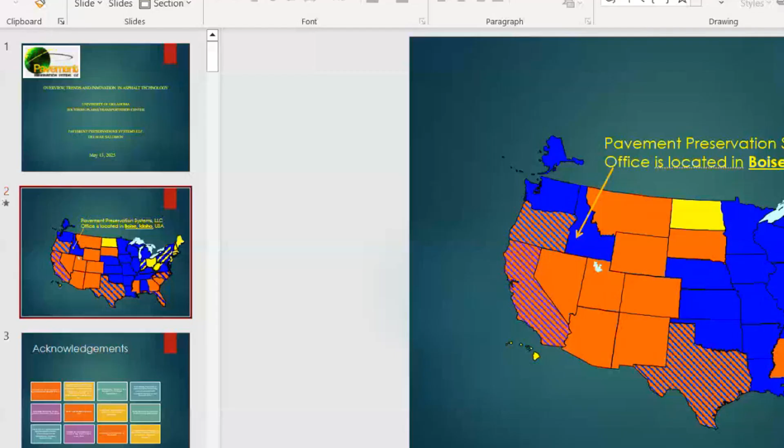And what we're doing is going through really a tour de force of this. It's on very specific things. There'll be a lot of references in the back for you to see, and we can go on from there. But I want to give you a kind of walkthrough of this.

So as I said, there's little I did, and there are acknowledgements. I could not do this without all the people. As I said, I stand on the shoulders of giants, so to speak. We have many contributors in here and research reports. I should say that I give you this outline. I'll talk about...

things like transportation logistics, but very, very short, and the things that have come across. And I'll also talk about some asphalt additives. I'm not going in deep in that, just as a glimpse of what's going on. There are a lot of new things, all right? And every time you turn around, there's something new. That doesn't mean it's necessarily good.

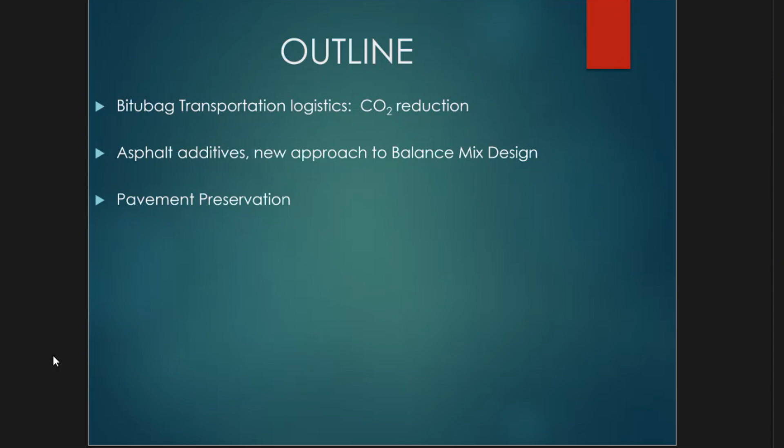really, the core of this talk, I think, is quality. We always talk about technical things, but the fingerprinting of the asphalt, it's been around, but there are some tools that are out there, new, necessary to this industry, and I want to talk a little bit about that at the end of the talk. And then I want to talk about a process innovation.

When I talk about a process innovation, it means that it increases productivity. And so I'll show some tools, technology that exists. If you put them together, they become a process innovation. They increase your productivity, okay? So it's not all about one thing, there's lots of technologies. And so we have to put them into processes, so to speak. And...

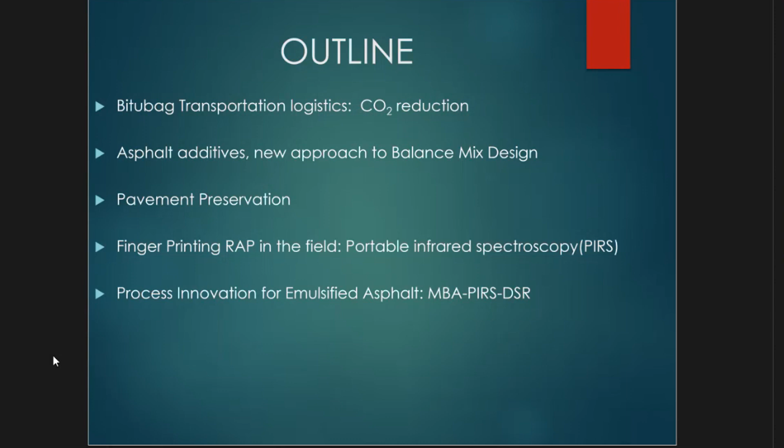then I'll have the conclusion on this. But before I say, asphalt is a very complex thing. We'll hear that. There's a mantra that the world is very complex, from politics to materials. But we have to make some assumptions, not some premise. And in asphalt, what do we say?

And what you see, I think what comes from all this, and I was talking with Ken in the laboratory, I see all the equipment, all that went through and so forth and so on. Asphalt starts out with the name ductile. It's ductile, flexible. But guess what? Like everything, it ages and it goes brittle. And what I see in the industry today is a struggle for finding, hey, where does this fail, right?

At the beginning of Superpave, it was rutting, right? Oh, there was rutting. Let's cure that, okay? So I think, remember that premise. We start from ductile and we end up in brittle. And what all this stuff is all about, where can we catch this? How can we measure it? What's the best way? And I see all the cracking tests out there. So it means we're still searching, but it's a good thing.

So let me talk about the traditional asphalt logistics. It's hot asphalt. And how do we know about this? Well, I would say half the world uses asphalt in a solid bag. Asphalt is cold. How many have seen asphalt cold in a bag, 1 metric ton? Anybody have seen that? Okay, in the Andes, South America, the 5 Andean countries, Peru, Ecuador, Colombia, Bolivia, Chile,

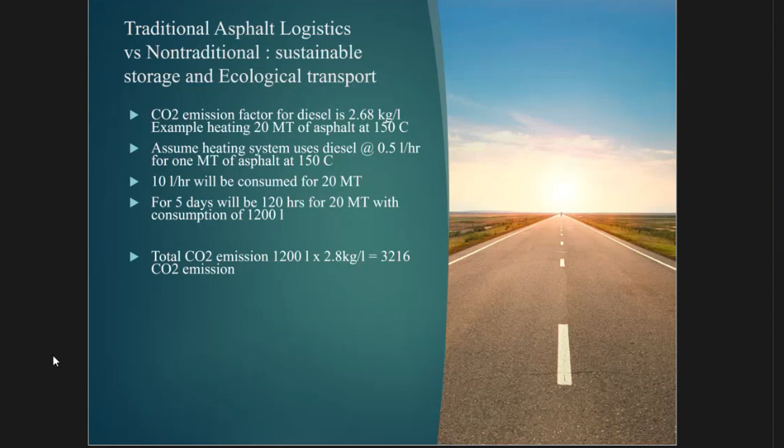Since we talk about carbon footprint, this is an opportunity to throw that in. So for hot asphalt, these are some parameters you can look up - there's a diesel factor and so forth. In the end, you do some calculations for 20 metric tons of asphalt.

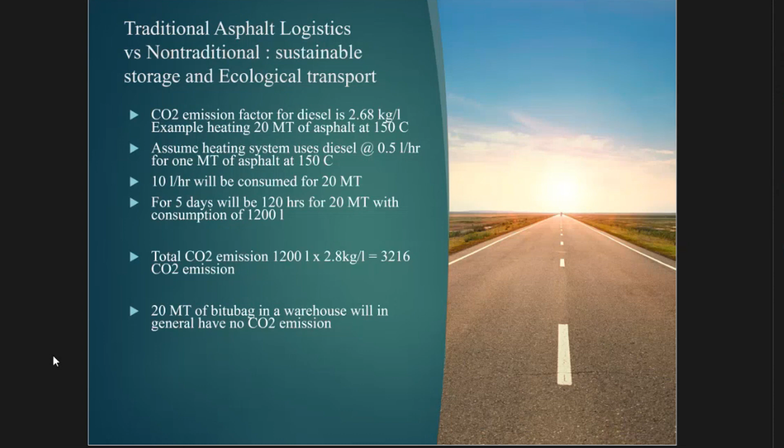And you have 3,200. Well, the hot asphalt will be sitting in storage until you're ready to use it - imagine you have to use tons and tons of this. I know in this country the refineries are close by, but you still keep them in a tank. Where I worked in Idaho a few years ago, we used to buy in the winter and keep it, freeze it. If it was modified it would freeze, but you had to heat it up slowly, so to speak. That's all I'm going to say about carbon footprint for the moment.

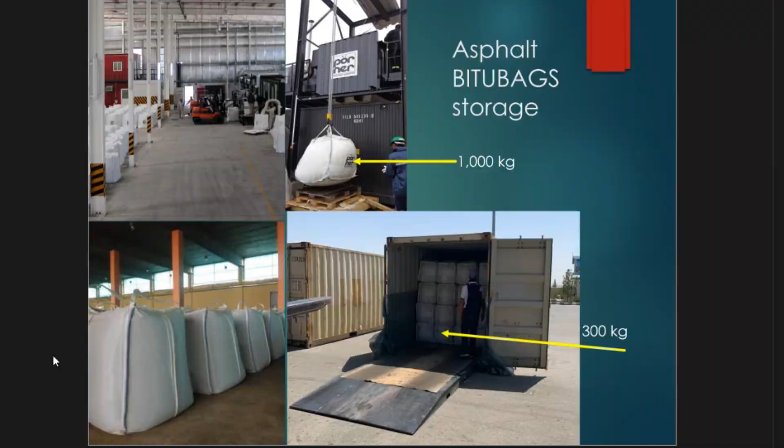So they come in one metric ton, and they also come in 300 kilogram bags. And so I want to share with you my concept, since we talk about what I call the magic pyramid of pavement technology, because we're always talking about this.

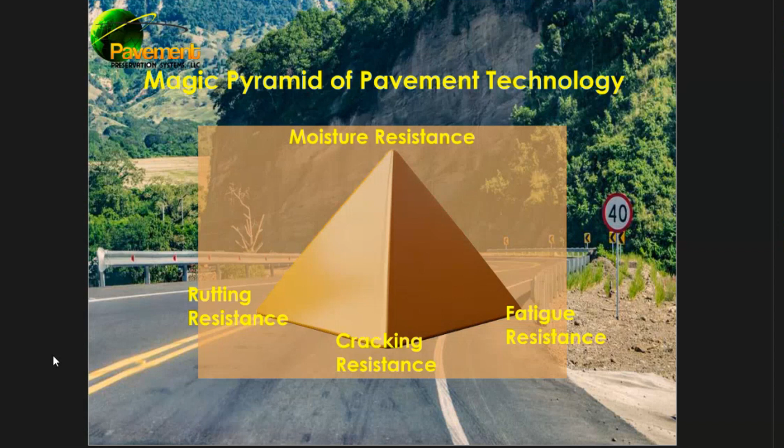I want to compare this with the tire industry. A lot of the technologies came out of the tire industry - cross-link and polymer modified actually came out of the tire industry. I want to do a comparison. I have down there the reduction footprint for this.

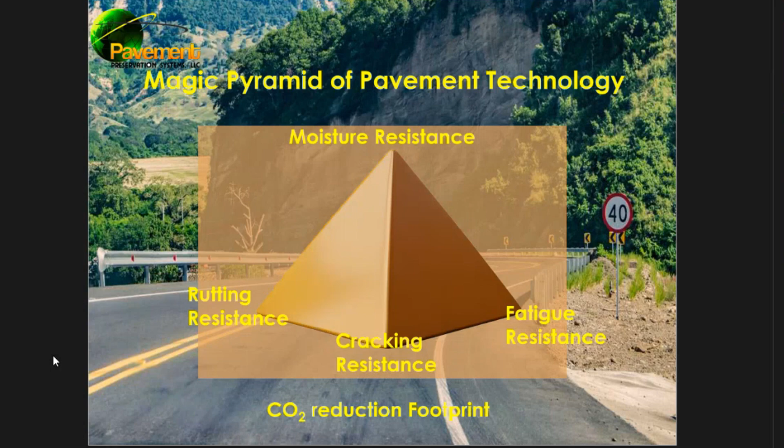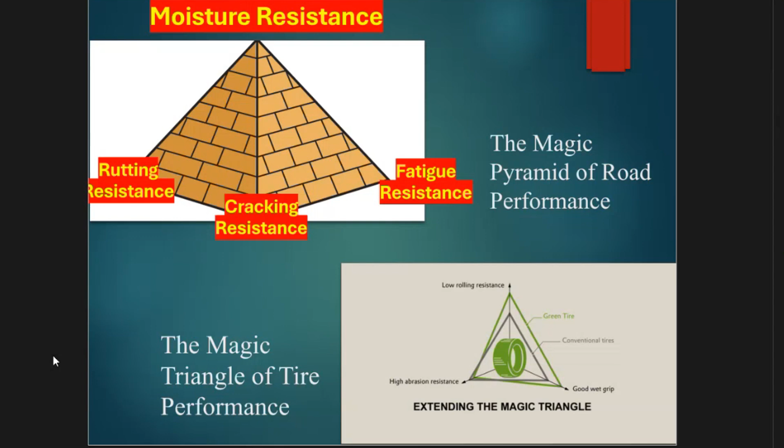That's what we have to do today. So the magic pyramid - the actual designing of tires, they actually have a magic triangle of tire. And what's that all about? Well, it's about needing to get the wet grip, they need abrasion resistance, so they have to balance three things all the time.

And we used to sell into the polymer industry. They want this type of polymer, but one thing affects good grip but not good abrasion, that kind of thing. So it's a similar comparison, perhaps a little bit more complex here.

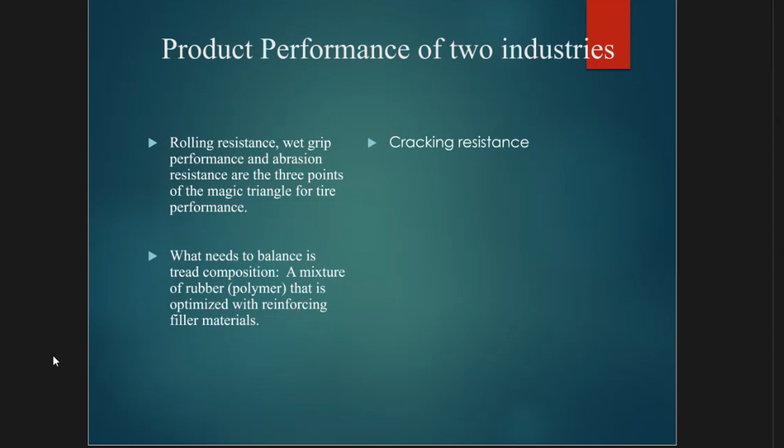We have cracking, rutting, moisture resistance, and the decisive factor here is asphalt. And what we've done is we have all kinds of additives that we have placed in those polymers, oligomers. We have RAM as the new definition of recycled asphalt materials, RAP and RAS, plastics, and sometimes we need to stand back.

We're experimenting, but what is to be done? In essence, the asphalt is a carbon material - it will take certain things, it will not take others. From a basic standpoint, unless the laws of physics have changed, we need to discover what those laws would be.

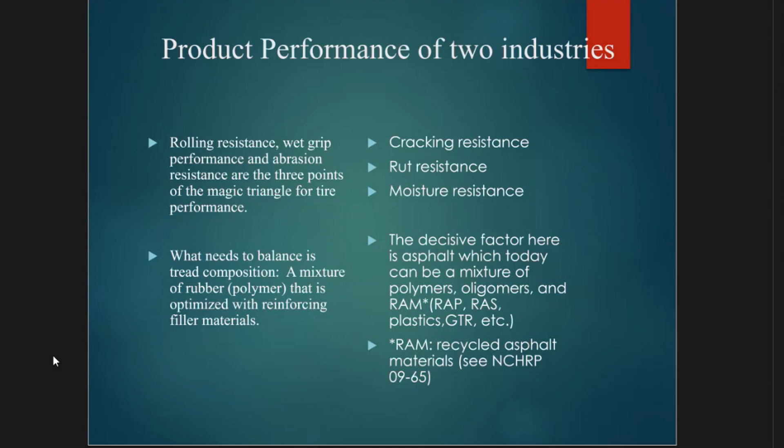So let's move ahead here and see what we have here. So we have development of the last 40 years, and there was a definition of innovation from the beginning, and a lot of these things came out of the Federal Highway Administration, a lot of research that came out of this, and what I wanted to show you here is, if I can bring it up this way.

So you see, we have a lot of proposals for innovation back then. A lot of rheology - you know a lot of that rheology imported from the polymer industry came into our industry. We had low temperature considerations, the redefinition of what low temperature means in the pavement, what you measure at the pavement, and then polymer chemical modification.

I want to say we always hear about polymer modification. Well, the chemical modification I'm referring to is polyphosphoric acid, which is a short polymer that modifies the asphalt. There are a lot of myths about polyphosphoric acid - the Asphalt Institute has a report out on that. And as Ken and I were discussing, sometimes a good thing, you overdo it, and you make a bad thing out of it.

And we have some new parameters, and I'll discuss these parameters very quickly, because a lot of things, people ask, hey, what is this all about?

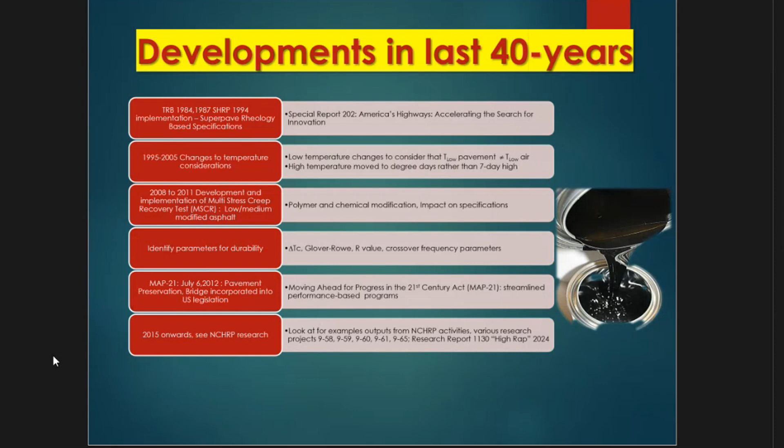Here are some of the details of that. We have the binders, the other things that were done with the BBR. We'll talk a little bit about the delta TC. Everybody here, we have the so-called R value. Let's stand here and focus on that one.

Okay, you can't see this? No, but I can see it, the people online can't. All right, they want to see this one. No, they're able to see anyway. Yeah, the slide, but I think they cannot see you. They cannot see me. I don't want to see you. They don't want to see me.

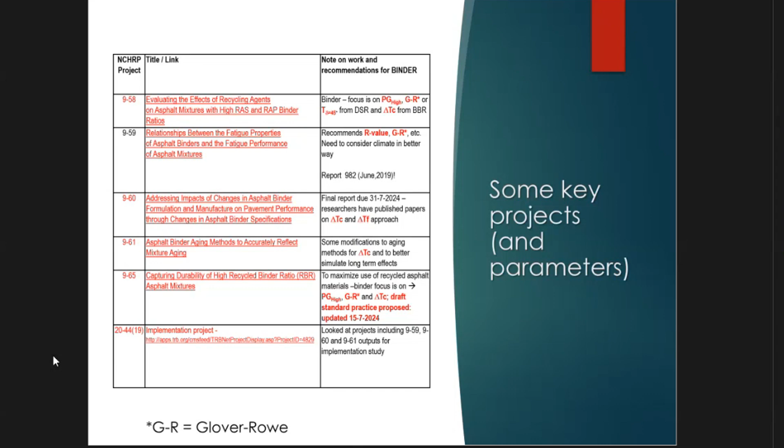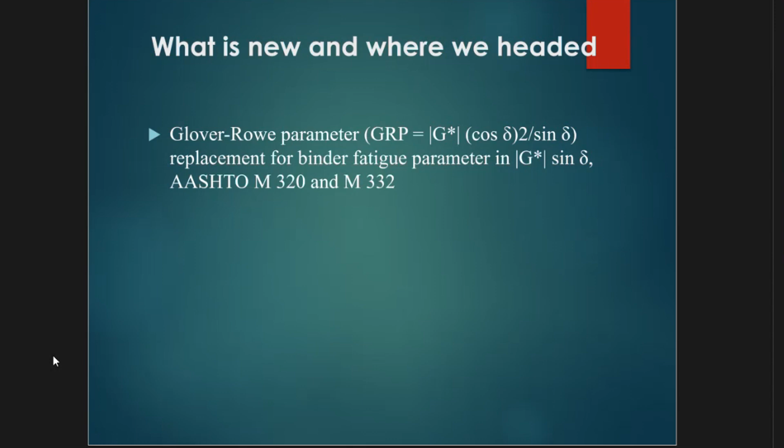Okay, so anyway, we have a series of projects, and what we're doing, what is new, and where we're headed. So we have, and they're not necessarily in order.

The Glover-Rowe parameter, I don't know if people know where this originally came from. Glover used to go to Peterson and talk about how they measure ductility. So it's really a ductility event. And Rowe took it and plugged it into some rheology, and came up to do some tests at 15 degrees at 0.005 radians, and came up with this cracking, this opportunity to predict cracking, intermediate cracking. And then we have non-loaded cracking here, and we have the R value that's come out of a Christensen model.

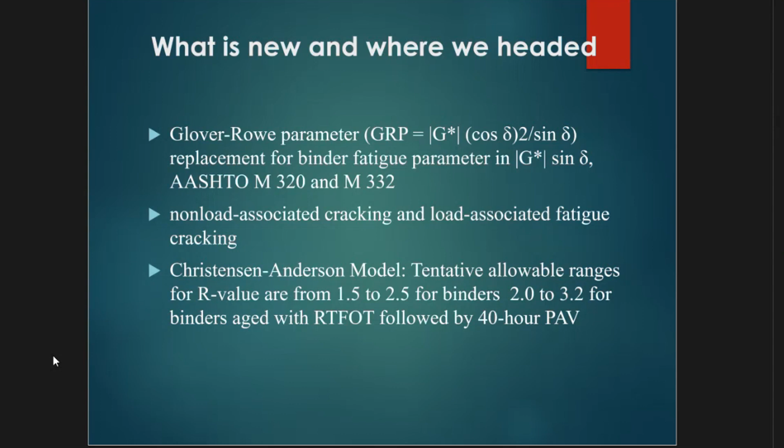So what are we looking for here? If I'm a supplier or contractor, I'm looking for something that guides me and tells me, hey, this number. So there's some numbers. I'll call them today's magical number.

Aging, we have to think about that too. So the four physical things I like to talk about here is, first, thinking about could we have one thing that tells, at least from the binder point of view, hey, this is this number. So we have some numbers for the R value that came up out of Christensen and Anderson. It's a rheological model. And those numbers, if you are within 2.5, it has to do with the cracking, at low temperature and aging, okay?

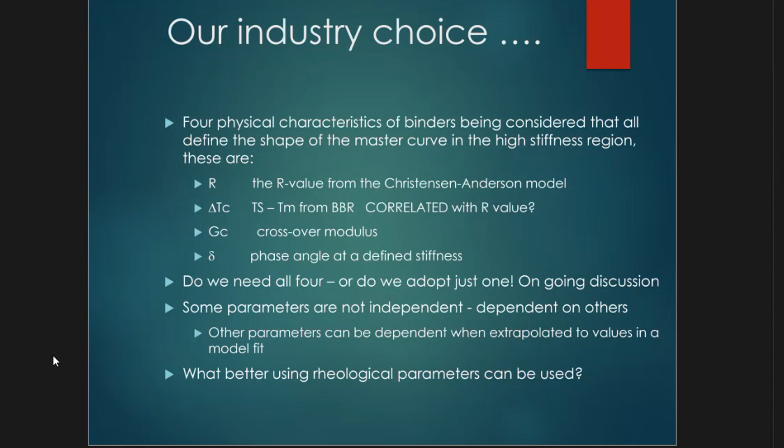And then we have the delta TC. The delta TC, you can see here, is it's a difference between a critical temperature for the stiffness and the M value. So you measure these and you look at them and you come to a difference. I'll give you some examples of that. The crossover modulus is a little shadowy. People are thinking of phase angles also. So do we need all four is what the proposition is saying, what people are working on. And so can we come up with one parameter to do this?

So let's talk about this one, the delta TC, MSCR relation to modification. I'm going to make the first caveat here. I talk about asphalt being ductile going to brittle. We talk about modification—there was no modification, and there was modification with SBS, if you like. That was the traditional modifier. There are other modifiers and so forth. And all the modifier does is increase the modulus, stiffens the material, right?

And if you're not careful, some of them may even change the bottom temperature of the asphalt. So what you have, this critical temperature, when you reach these particular numbers, you want to see what those differences are. What's the magical number? So what we have for this delta TC, and the delta TC is actually measured in the thermal cracking of the binder, okay? So it's a specification that could be 2.5.

The best today, they agree, it's not a consensus number, and it depends. Some agencies may say that, they take some recommendations, and one of them today is -5 degrees C. So if you had something like -6 when you did that measurement between the stiffness, the critical temperature for the stiffness and the M value, if you got something lower, you say, hey, that's not a good thing.

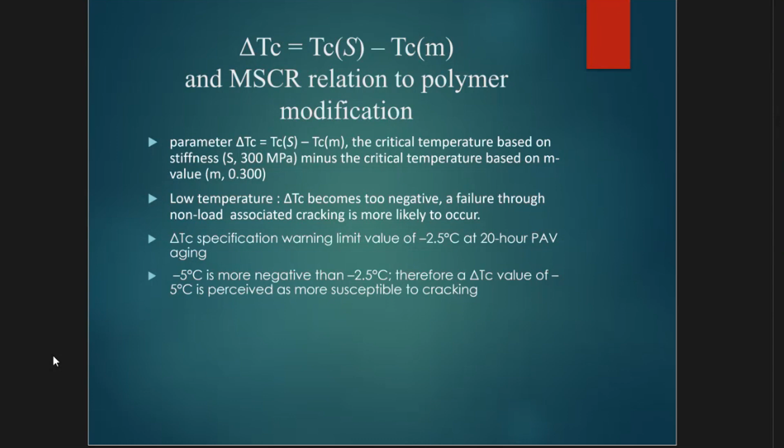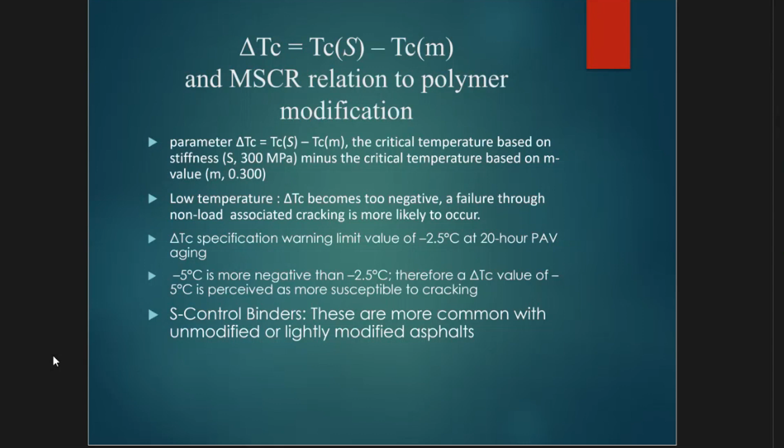It's going to crack, that's what's going to happen to that thing. But I started to say, when we modify beyond a certain amount, this doesn't hold. They haven't shown this yet, but I will bring that caveat up in a moment. So you have, in general, S-control binders and M-control binders. In general, S-control binders are not heavily modified, and so on. Some agencies have taken -5 to use as a guide. Let's see what we have—I mean, an example of this 6422, it's a neat asphalt.

So that's a T of -3.6. And with 3% polymer, 3.9, at 7.5. So we have -7. Now, it's not a consensus, but generally at -5 is not very good. So -4 is better than -5. This isn't very good, but it performs in the field.

It's like anything else, right? This performs in the field. We'll go through that in a minute. What's behind all this?

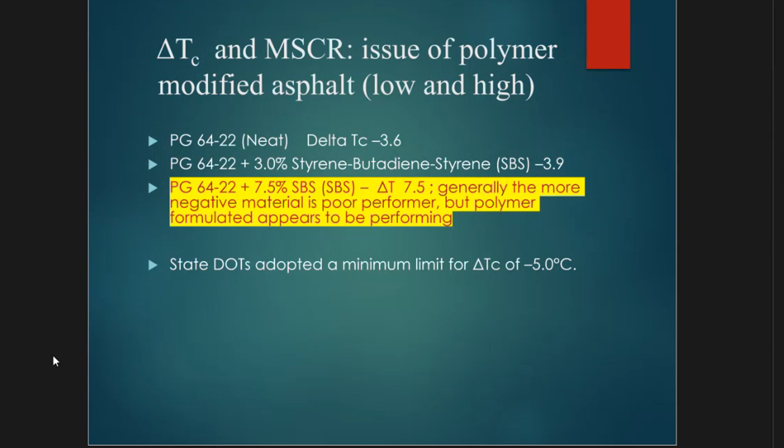Again, some agencies say, okay, let's use -5, and they can play with that number. But what about the Glover-Rowe parameter? It has been considered as a surrogate, but there's no consensus. The debate is ongoing with this, right? And it's all based on some rheological transposition. I have a reference there if you want to look that up.

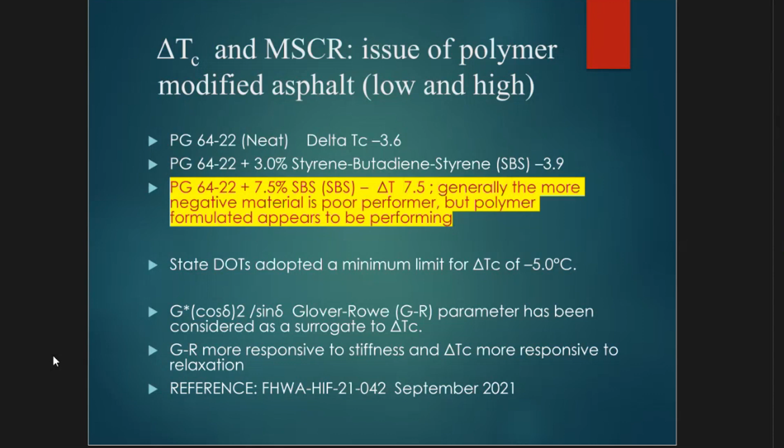All right, let's talk about this modification here. The base asphalt, you do fluorescence, and we have all these tools that we can look at 2%. If we do see polymer, it's a typical SBS polymer in asphalt, okay? And as you progress here to the continuous phase, the continuous phase being the asphalt, right?

And as you go up past 5-6% higher, you get a phase inversion. The continuous phase is now polymer, okay, it's not asphalt.

Let me say something about the people who do aging and asphalt. If you did some aging and asphalt, in fact, the polymer can mask the aging of the asphalt. Just telling you that. And so we have this phase inversion. So those parameters generally are measuring the rheology of the continuous phase, in that case the asphalt. So that's just for people thinking about what's happening.

And why am I bringing this up? Because I think one or two SBS manufacturers come up with new polymers. I played with some of them. They're still SBS, but they're talking about the conformation that makes them easy to go in, doesn't make it very viscous, and so forth. So you have that situation of making thinner pavements and so forth.

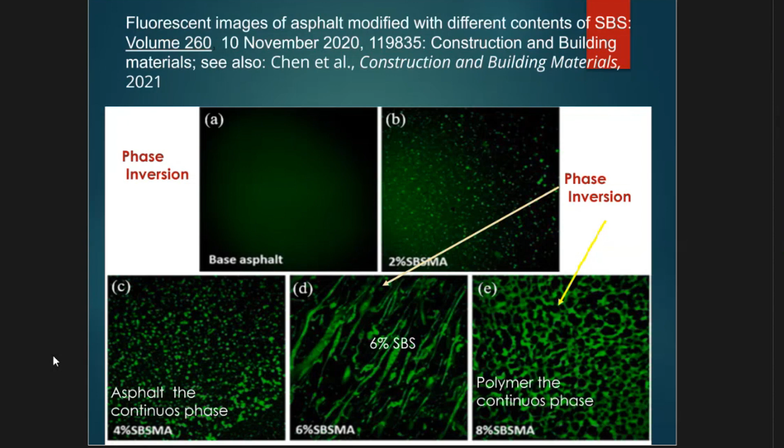But again, the rules for looking at the rheology is you've got to be careful. They probably need to be benchmarked again if the industry is going to grow in the direction of increasing polymer content, right? And so some of these modifiers, you're very familiar with traditional inorganic oligomer, refer to that as PPA, polyphosphoric acid, has been used.

And I don't know if edible oil is very popular. At one time it used to be. People are playing around with plastic. But the chemistry of the asphalt changes has components that make it easy for certain types of materials to go in there. High density polyethylene and linear low density polyethylene and so forth. PET from the Coke bottles, you can use those. But again, there's always a compatibility question between the asphalt you use and the ingredients you're putting in, right?

And ground tire rubber, again, that's seen. And these, without going into details, there are several technologies. Either it could be done at a plant where they put it in, like with a polymer. In the case of California, they use other agents to make it easy to go into the material. They used to use gilsonite, by the way, many years ago, but this gilsonite can make your bottom temperature go back, so to speak. It's a drilling fluid, but again, and over here, the more non-traditional stuff.

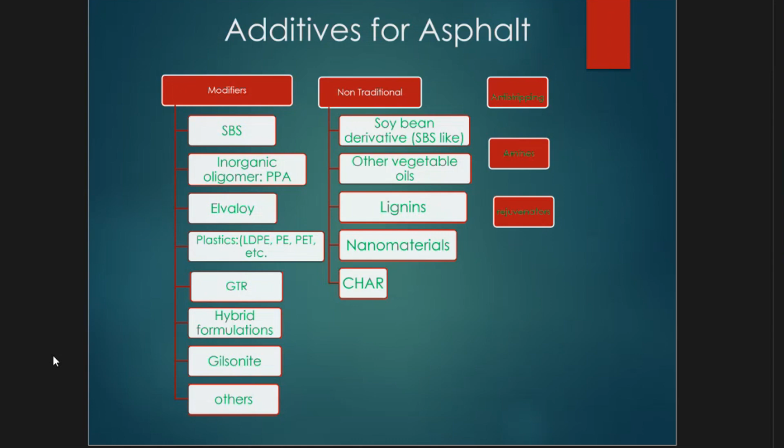And so what are the benefits for this? Well, the benefits are environmental and that kind of thing. And of course, we have anti-stripping agents, and those can also be biomaterials, right?

Now, balanced mix design. This is the first definition that came out, and you want to get performance of your road, but every user or every region has its distresses. So I understand there's no national criteria of balanced design. Nobody's going to say, hey, you've got to do this. That's my understanding as of last week.

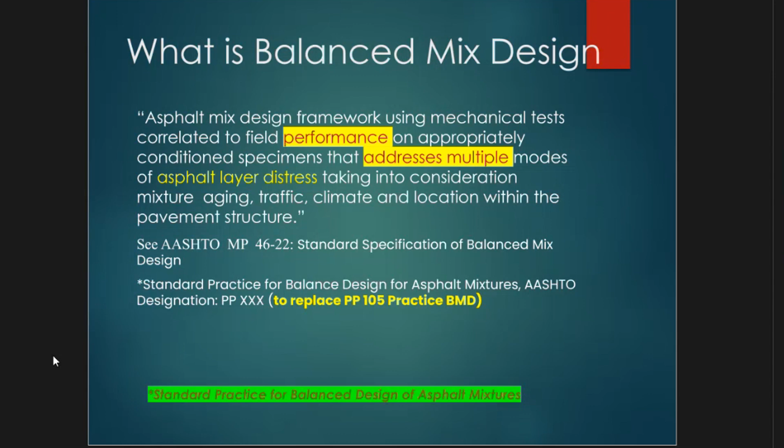So there's the AASHTO specification, which is 4622. And this standard practice of balanced design is probably going to go to ballot. It's to replace PP105, which I believe had the A, B, C, D categories. Now it's going to be a little different. And when I say different, it's really that if you're doing your performance testing, you can start out with a fundamental thing, and then you progress.

But every time you move into more tests, it's more money, right? So I guess you got to think about what you're doing. It's not just testing to get well, of course, the best performance, but you need to balance all that.

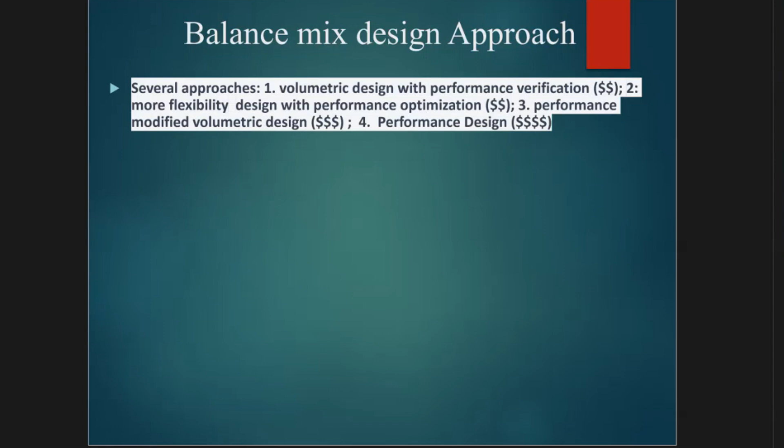It's about aging, I said. It's about aging, right? So if I don't do proper aging, it doesn't matter where it is, I ain't gonna come up with a correct test, so to speak.

You'll find that some of the agencies should identify if its distress is fatigue or cracking, then it will address that. But it wants to keep in balance with that triangle, keeping its rutting and the other things in play.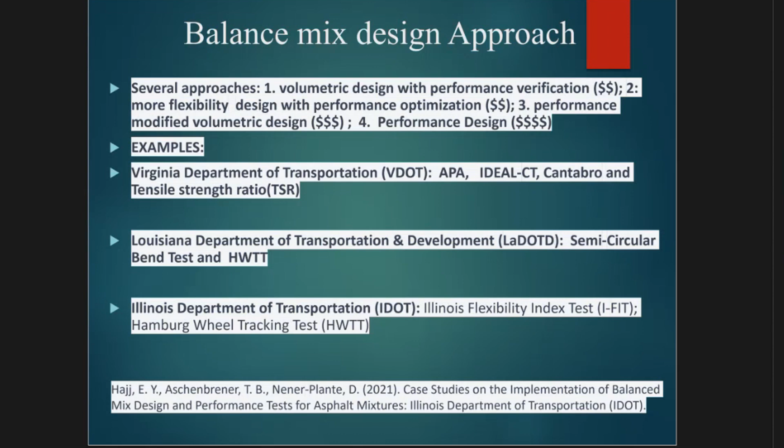Illinois has the flexibility test. I've seen some box around here for that, and wheel tracking. This is what they're saying. So we have a series addressing the performance, and you want to reduce volumetrics, VMA, voids, and so forth. So as you progress in your performance testing, and you're looking at asphalt layers, top layers so to speak, they want to address climate and that kind of thing.

So this is going to be balloted sometime in August, I guess, this year. The tier 1 is really the basic baseline. It doesn't say what you do. So they have a long, big table of the constituents, the volumetrics, and whatever you're going to do. You look at the big table that's going to be balloted on this.

And so if you go to tier 2, it's like the ABCD type thing. You have greater flexibility, you do less of your volumetric so to speak. Of course, it gets a little bit more expensive. You need to train people. And I guess you need to say, do I need to do this? Can I address this distress without kind of following along those lines?

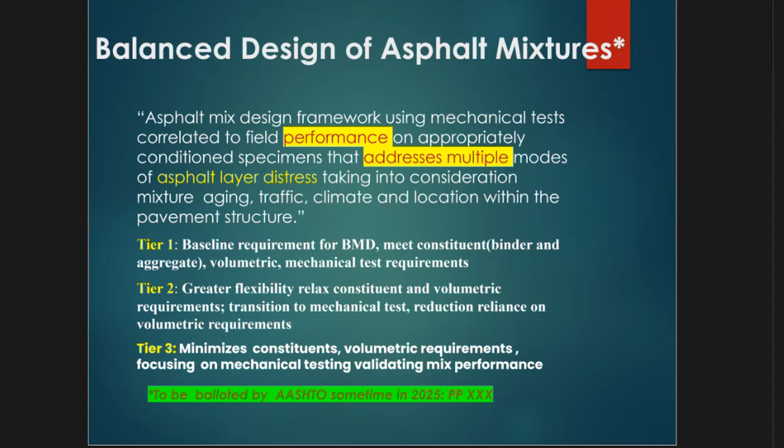It doesn't mean everybody's going to get there. So to minimize here in tier 3, it's kind of like what you had, the ABCDE volumetric requirement and focusing, notice I'm saying, and the mechanical testing, validating mix performance.

Here I would put in myself, and we've come to the latter part of my talk, is why are we not looking at the chemical? Why are we not? We have new tools. They're portable tools, and they're easy to do. But we'll mention that as we go down here in the presentation.

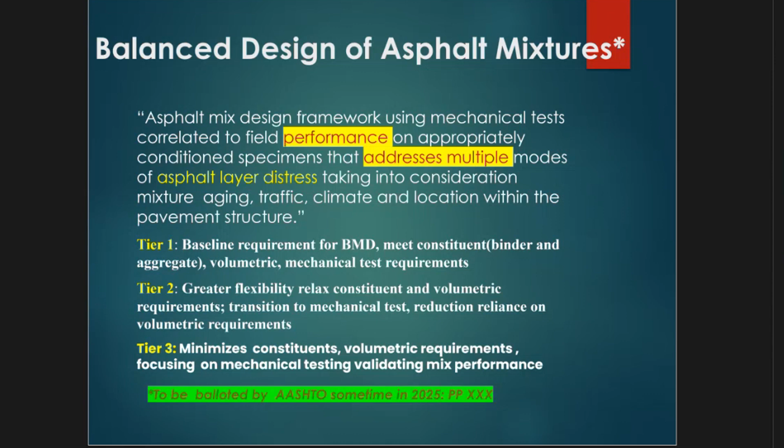So this performance test, I'll just list the longest list, which is for cracking. You can see as we go down the line here, the indirect test. The one that's very popular is obviously that first one. I go to visiting some users, and that's what I see, that this is very popular, all right? Flexibility, Illinois flexibility, the semicircular test, and so forth. And look, these are all cracking tests.

All cracking tests. And I want to show you one that I think is unique. It's a BBR, and the University of Utah is doing the Pedro Romero. AASHTO has a provisional 125. Basically, I looked at it myself, and it's an instrument made by Cannon, but Cannon does not make this anymore. Really, it's a BBR, and they're putting a 1 kilogram load on the material. I like that because you can drive the weight up, and you can literally hear the material crack. I had a material with 30% RAP in it, but the other person at the University of Utah has that kind of material, equipment I should say.

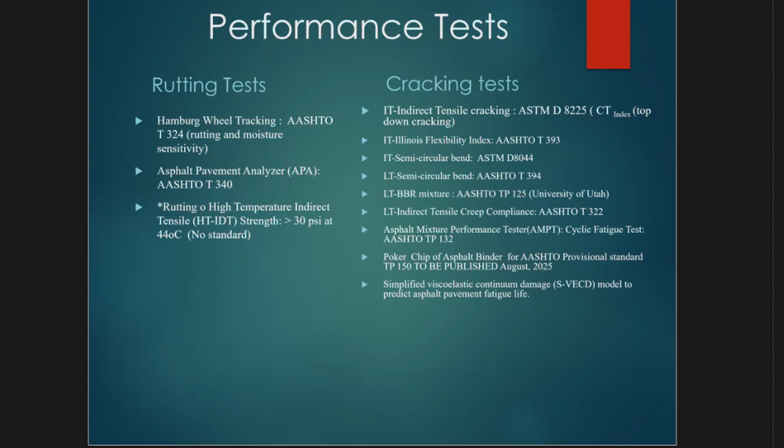Here's a look at all the cracking tests that we have - mixture performance testing. This is the newest one, I talked with Amit Bhasin about it. This is TP-150, coming out this August. It's a poker chip test for asphalt. This simplified version is Richard Kim's test, though it's had very little use, I should say.

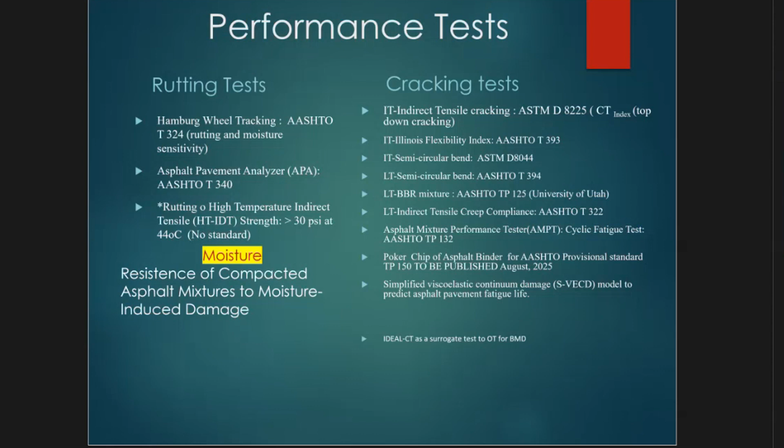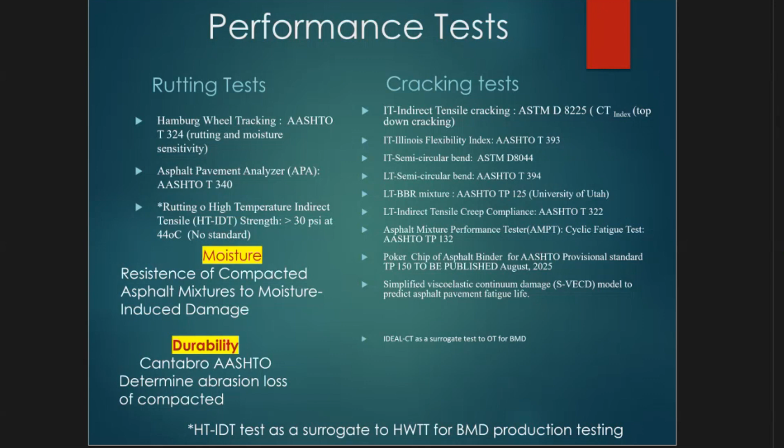This ideal test is a surrogate for those other tests. And what we have to do is moisture testing. I don't know who's doing the Cantabro test, but I think Virginia is doing one to determine abrasion of compacted materials. There's also one here meant as a surrogate for the Hamburg test, and this one is the rutting high temperature indirect tensile test. How many people have done this particular test? By the time I walk out of the room, there'll probably be a new one.

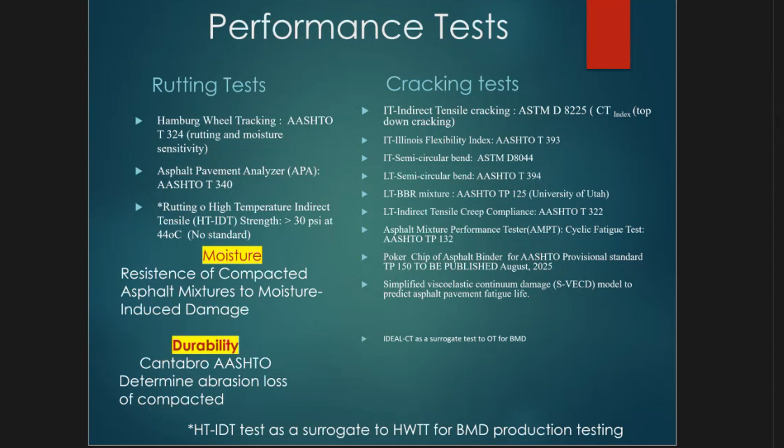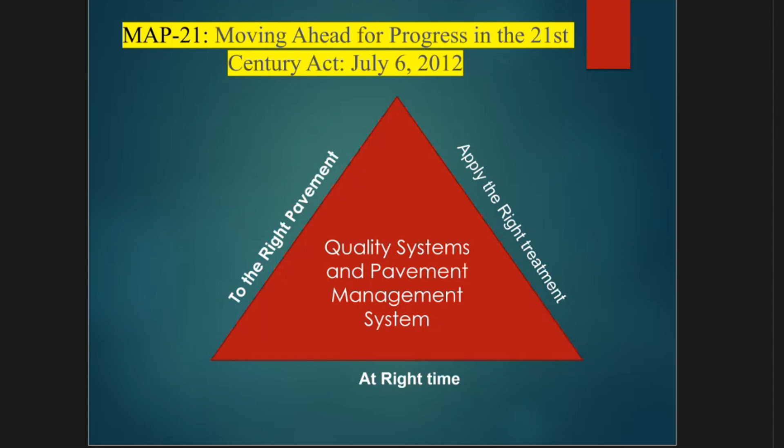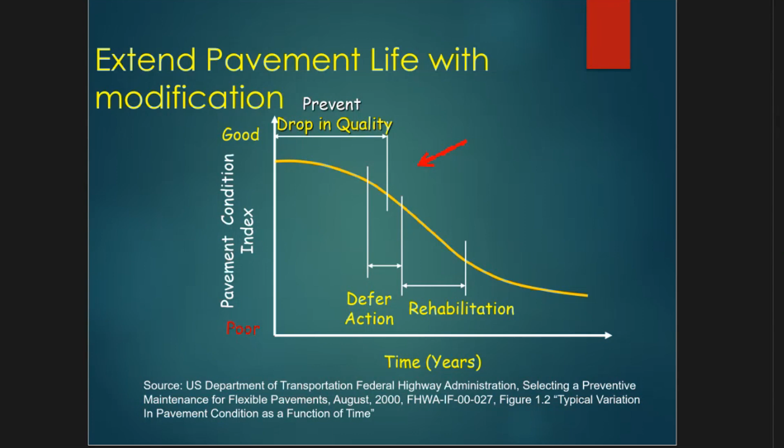So if you don't do anything, you'll end up in what I call the rehabilitation zone. If you did not do anything, you'd have to really overbuild the road. So it costs you less to maintain your pavement - like going to the dentist or the doctor. It's common sense, but you can see you spend a lot of money here. That was the idea: extend the pavement life. I think we're still in that cycle.

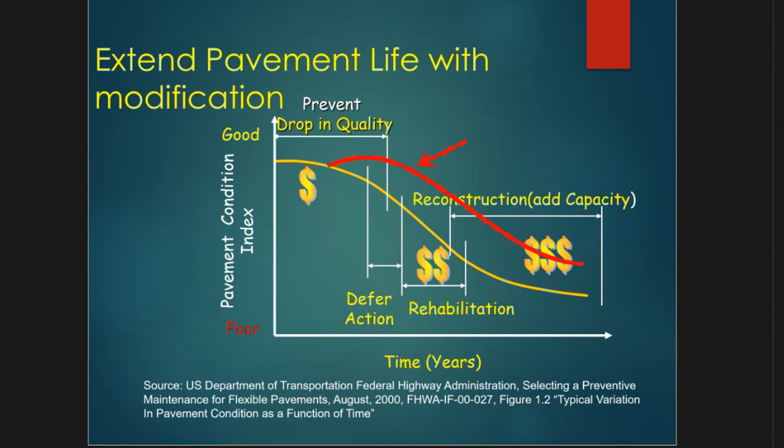User agencies should have a pavement preservation group, which would be a substructure of the pavement management group. That's my curve. I put polymer modified material in there because that would prolong things - if you put in some more money and make a modified material, maybe your maintenance will be deferred for a while. That's just me - I can say that at this point in my life, be a poet about it. So, modified asphalt I have here.

Preservation - what are all the different things? I know you guys are getting into emulsions. I just think about all the things that exist, and I know a lot of these are being improved - surface treatments. Your pavement has to be functionally okay, it can't just be structurally unsound. Don't do a pavement that's cracked from the bottom and just fill it with crack seal thinking it's going to last. You need to know the pavement is in good condition before you do this.

There was a lot of debate at the beginning about what should count as a preservation treatment. There was a lot of debate in AEMA, ISSA, and ARRA about this, because in those organizations there are contractors and then there are suppliers. I have a relative cost breakdown here.

Crack sealant is the cheapest - I put it at 1. Fog seal is 1.25, tack coat is 1, and so forth. Slurry is 5.25, microsurfacing is 6.75, Cape seal is 7. Scrub seal is literally scrubbing and brooming the road - it's a polymer, an emulsion, highly modified. They go in, get into the cracks, sweep it in, scrub it, so to speak.

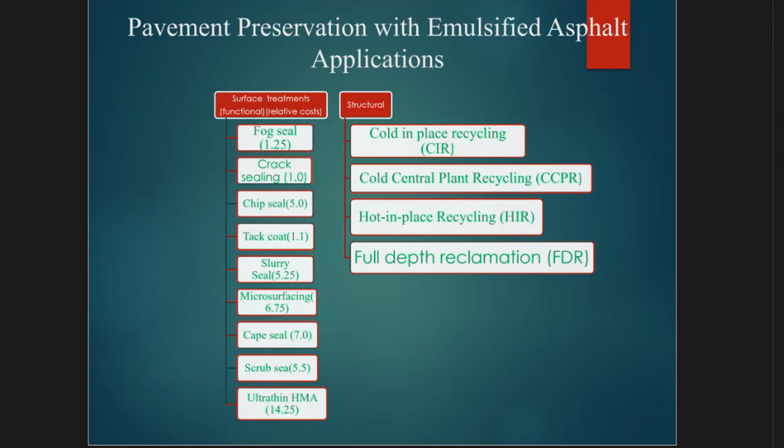Eventually the concrete industry got into pavement preservation - there was a lot of resistance from the concrete industry at that time, but they're in here now. And for structural treatments we have cold mix asphalt, cold-in-place recycling, 4-inch down, 5-inch down - these are not considered preservation treatments. Cold central plant and so forth. I think there's an increase in some of this cold-in-place recycling. The user has to make a decision based on their budget and how they want to manage their group.

Let's talk about quality - portable infrared spectroscopy. Infrared spectroscopy isn't new to the industry; it's been used in the laboratory to look at, in particular, when asphalt starts to transition from ductile to brittle.

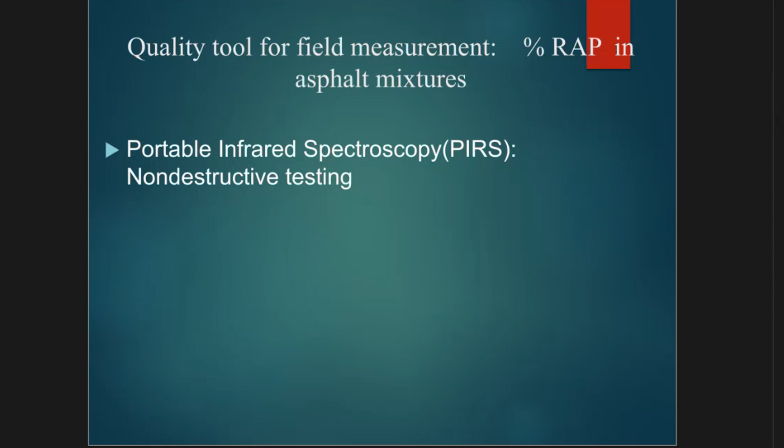And there's a signal, and they saw that signal is associated when they test the viscosity of that asphalt, how it flows - it was harder to flow, it had a greater viscosity. So there's a correlation between that spectra and the infrared. I don't want to give it a particular name, we say carbonyl, but think of it as a signal that increases as the thing changes.

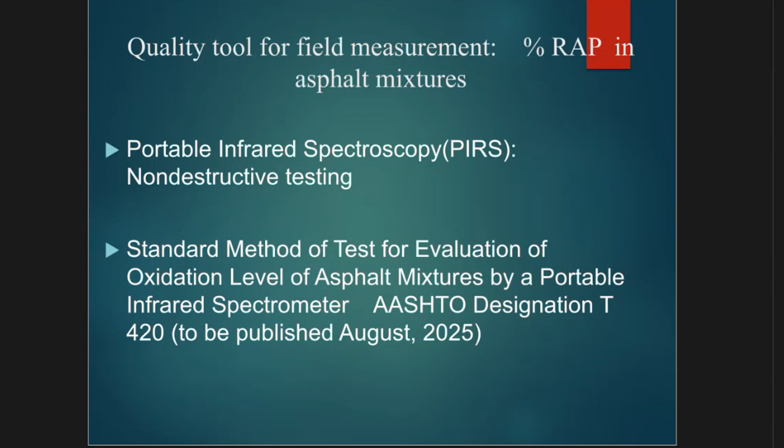So there's a standard that I had, a provisional standard in AASHTO using the portable infrared. I'll show how we got that. That recently became approved as a standard. It'll be published AASHTO T420, to be published this August. Let's see where we go with that.

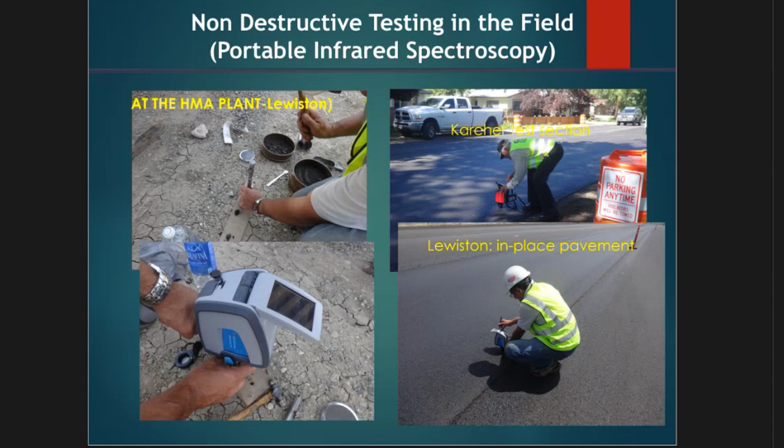So I used the portable infrared for the first time to look at detection at the plant. One had RAP, so the purpose of this was to look at RAP in the mix - take the portable, look at it. Of course we calibrated and went through all that. We took the approved mix design and spiked it with 0% RAP to 100% RAP. We got those signals, and those are the things used to follow this.

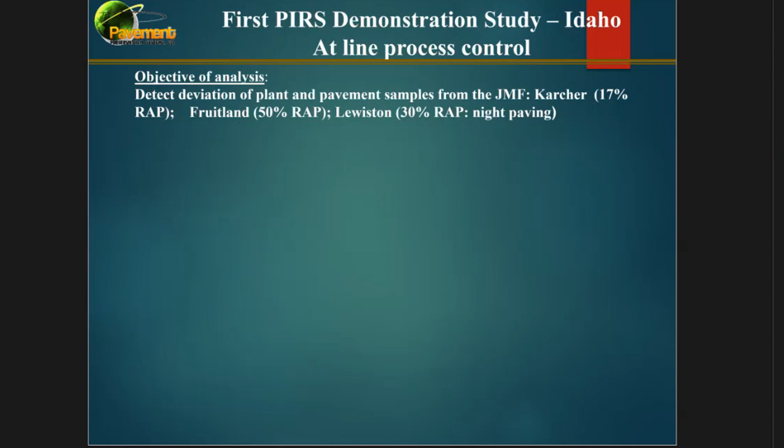So note that this was a nighttime pavement. Why am I mentioning nighttime pavement? Well, we worked in the daytime, so we went to collect samples at the hot mix plant - we're going to see it age, right? So those are the things you've got to plan for.

So anyway, the essence of that standard is you have an approved mix design, and then you get your job mix formula, which is the one you use out on the plant, so there's a fingerprint of that. There's a fingerprint while the plant is producing - we take samples right out there at the plant. And for the in-place pavement, we also take a signal of that. It's non-destructive, called diffuse reflectance infrared.

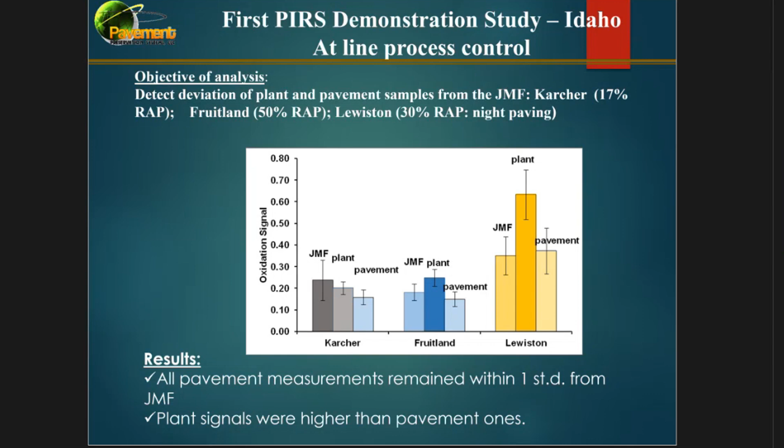So think of it - who are the stakeholders here? It's the materials engineer - I'd say the materials engineer likes this part, and the pavement engineer likes this part, because the following year you can go look at it and see what's agreed on the surface. We look at that pavement, so it can look at that. If you tell a pavement management engineer, 'hey, I can predict cracking,' he'll hug you, he'll love you - because predicting cracking is the thing you're trying to do on the material side.

So that's the essence of that. The standard method, again, the provisional 128, 2022 - now it's going to be the new standard. This was the Idaho report, report 249, back then looking at RAP in a mix. That was the purpose of that project.

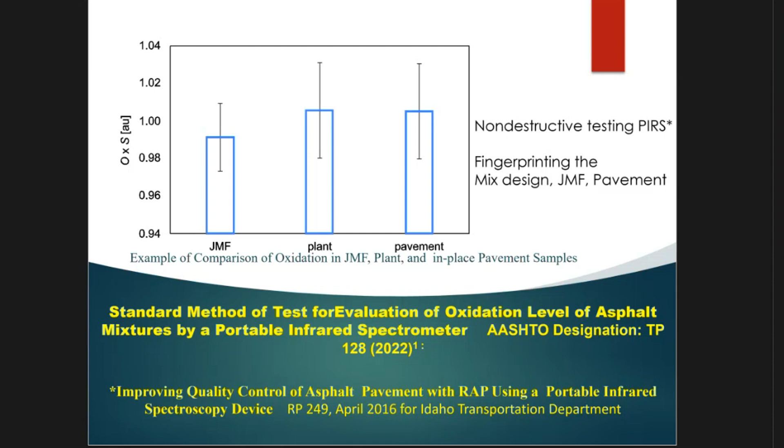So, process - we're talking about process innovation now. What I mean by process innovation is if I'm able to integrate things and make a workflow that increases productivity under safety and that kind of thing, I should push for that. So I have this abbreviation: MBA, PIRS, DSR - you know what the MBA is? A moisture balance analyzer and the portable infrared spectroscopy. What we want to show here is this process innovation.

This is the moisture balance analyzer. What we're showing is a recovery of an emulsion in the mold of a DSR. Then once that's recovered, I'll show this again - you can measure this in the DSR, and we're talking about the upper PG of the emulsified asphalt, of the residue. And then what I've integrated is another technology, it's a portable - well, we have these tools. We have these tools. So wouldn't it be nice?

I was talking to David at the Oklahoma DOT yesterday, and I'd had binders from them. I think it was Delta Tc - they had the same PG grade but different Delta Tc, and that can only be due to oxidation of some type. But if you had the portable instrument, you'd be able to tell something about that.

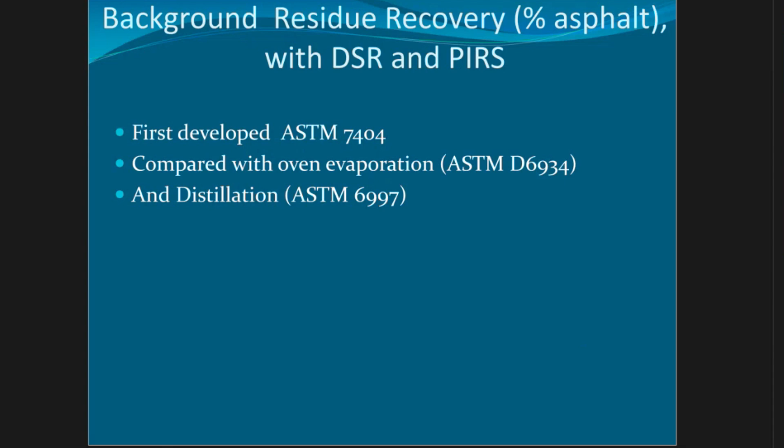The background to this is there's an ASTM standard for the moisture balance analyzer. There's a number for the standard - we did a comparison. If you look at standard 7404, embedded at the bottom there's a diagram which I'll show shortly, comparing one of the methods that's used right now.

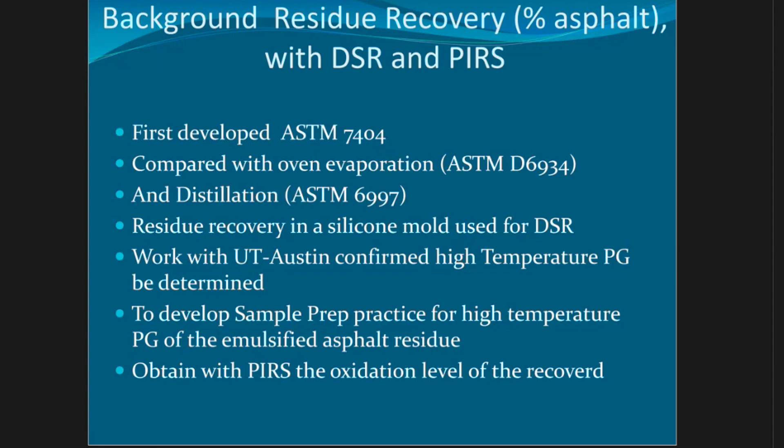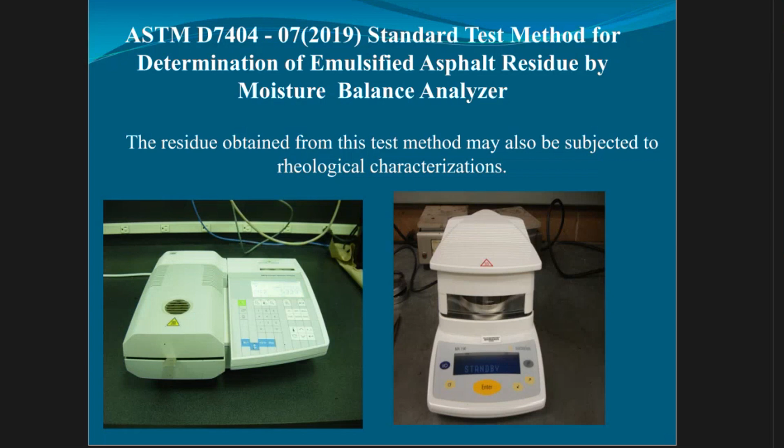So what we've butted onto this is the PIRS as a conceptual thing, so now they're all kind of using the moisture analyzer over there. So I had the University of Texas, Amit Bhasin - I said, why don't you do this, I'll get equipment for you. He got the equipment and did it his way, however he wanted. He wanted to show that this is easy, it can be done.

This is the one we generated a few years ago, showing the residue by evaporation. This is the oven - remember the oven is right, if I'm not mistaken, heavy piece of equipment. And the moisture balance analyzer is a little instrument right here - it's automated. You place your sample, you come back when it's done. You can set it for what percent you want, 0.1%, 0.01%.

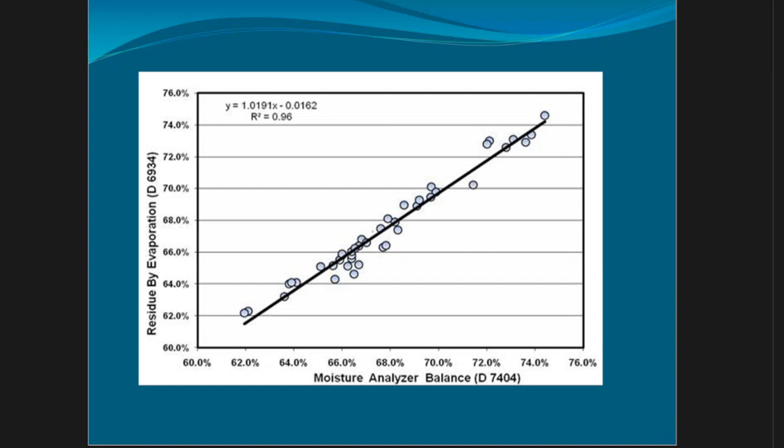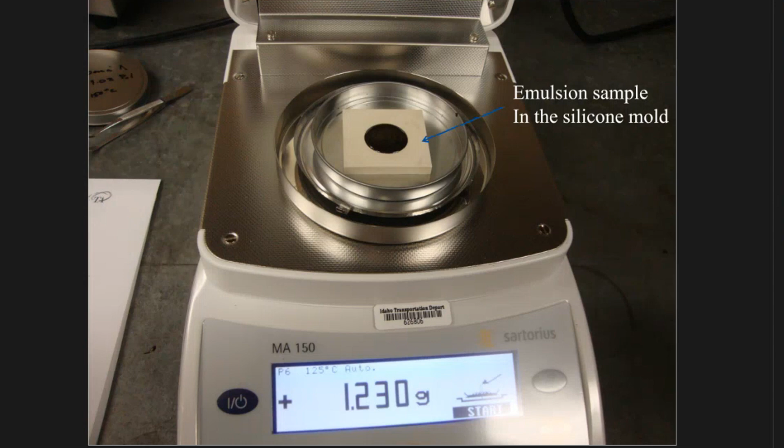So that's in the standard, and here's where you go through the steps. You can see the weight, you see this, right? Now, emulsion sample, you mold it for the DSR, silicone mold - would you do this again? Oh good. Anyway, that's what you've recovered, enough to put in the DSR - put it in the DSR, residue DSR.

This is not a standard - this would be something we would do into the practice. This is what we're doing in a procedure: we get it from the moisture balance and the amount of residue, we report it, your contract gets paid. You read the right amount because it's a pay factor. We'll do that, but then what we'd say - I'm just showing you again, right? Repetition, and that's it.

This was done at 160 degrees for non-modified. We didn't do a lot of modified, but that work can be done with your modified material at 100 degrees. There's a big debate when people do distillation - if they're doing polymer modified, there's a lot of debate about destroying the polymer, that it's not the one going to the road. So that's all down to it.

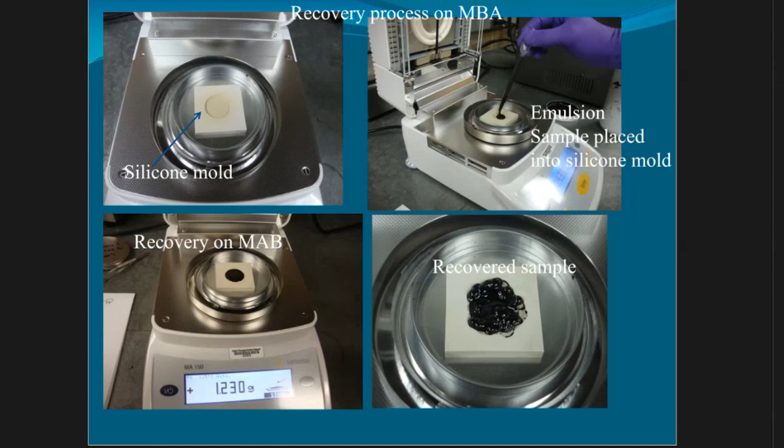So this is what University of Texas did - you see, the way they did it, they first recovered in this, what I call a two-step process, and then put it in the mold for the DSR. Everything is fine. What I had them do - I contacted the plant to get the emulsion, but I said before you send us an emulsion, send us the asphalt that will be emulsified. In the paper, it probably shows those results of the modified asphalt, the original asphalt, and then the asphalt that was emulsified. Those numbers are within, I don't know, 5% of each other, okay? Because there's a concern you may burn this, oxidize it, but those things can all be sorted out because my portable infrared serves as an internal control.

Hey, let me look at this - did we cook it too much? And that's not going to happen, you can control these things. So you have internal verification of the process. And here's a comment from my good friend Alan at Minnesota DOT - Minnesota DOT is using the moisture balance analyzer in the way they're saying.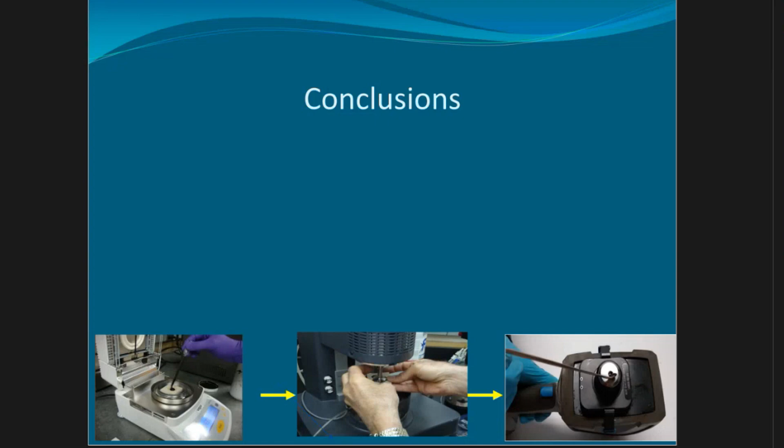So I'll just give the conclusion: this integrated approach takes less time and gives better accuracy. You don't have to be watching an oven or watching a distillation which has a flame on it, for example. Small footprint — you're going to save.

If you had ovens, there's some residue recovery where you spread the sample down — I think they're experimenting on that right now, a film left for 24 hours at 25 degrees. In the emulsion industry, it's 15% of the entire industry, I see. And even if it's accurate with expensive equipment, if you have to spend a lot of time, that's something you have to think about.

Anyway, I think they have one method that involves vacuum at low temperature. With the vacuum, you now need to maintain it — vacuums are tricky, and you need to keep the oven in condition. So you're talking about maintenance costs. You should look at this as a quality control tool, cutting down on maintenance cost while getting the accuracy you need.

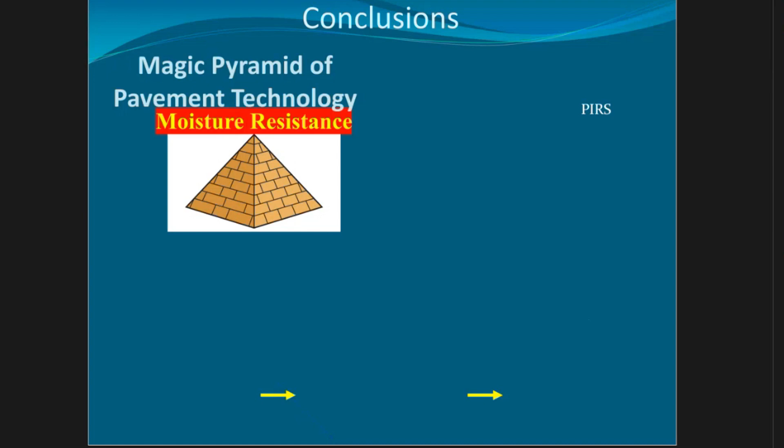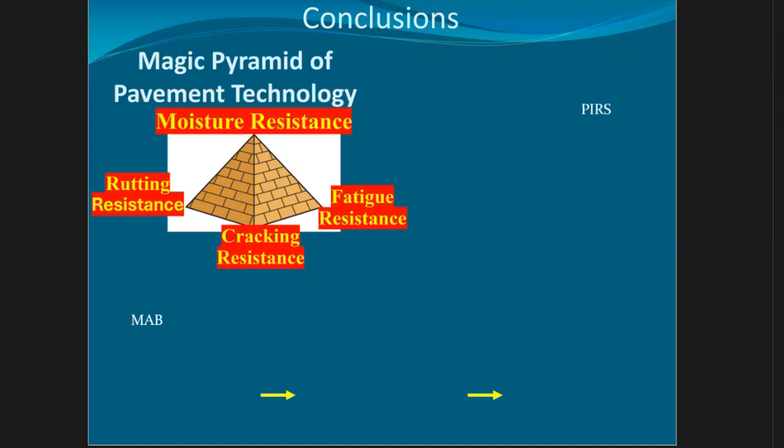So again, maybe we start with this magical pyramid — I'd call it the pavement technology pyramid — and the resistance and the things you need to balance in this industry with all the tests you need to do. Then we talk about this other thing, integrated process innovation, which includes your workflow in quality. So we talk about quality.

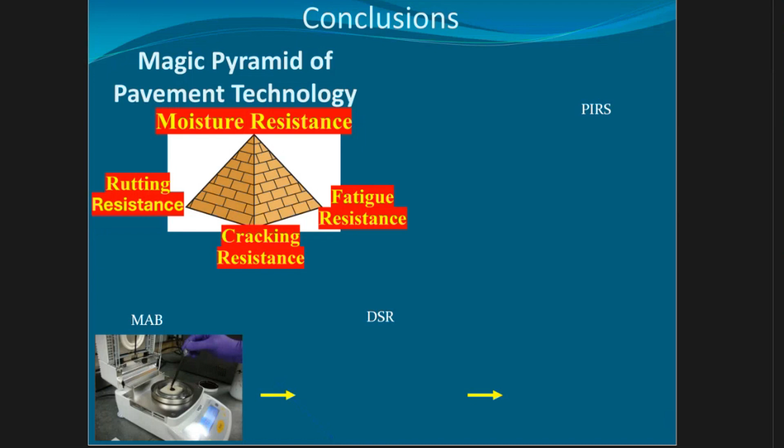When we talk about infrared, you're now not only going to have the material, the rheological properties. Granted, rheology is driven by some type of chemistry, but it forms structures that it's impossible to get from the chemistry, as you do with quantum mechanics.

But if you have a fingerprint, just like an FBI fingerprint, if I have a broken bone, what do I do, right? So I think we can integrate this process. If we take this over to balance mix design, the people doing balance design, it doesn't hurt to fingerprint the material.

It takes, how many seconds? About 20 scans a second. You put that in an Excel sheet and you have a fingerprint of that material, so you know something about its age when you put it in, or whatever you're doing. So it's a powerful tool, and that's all equipment.

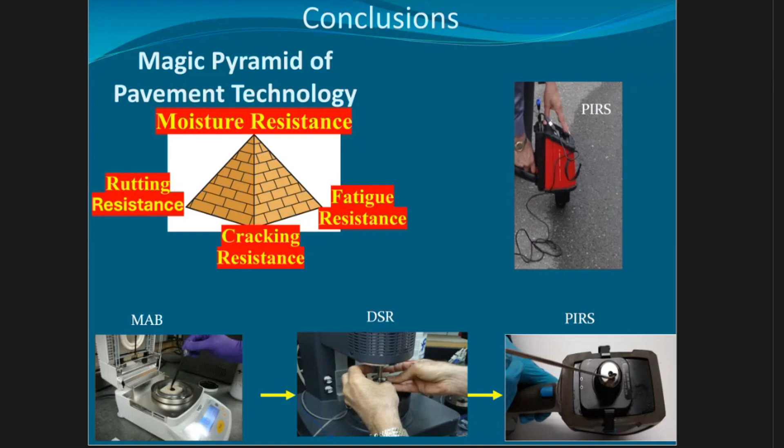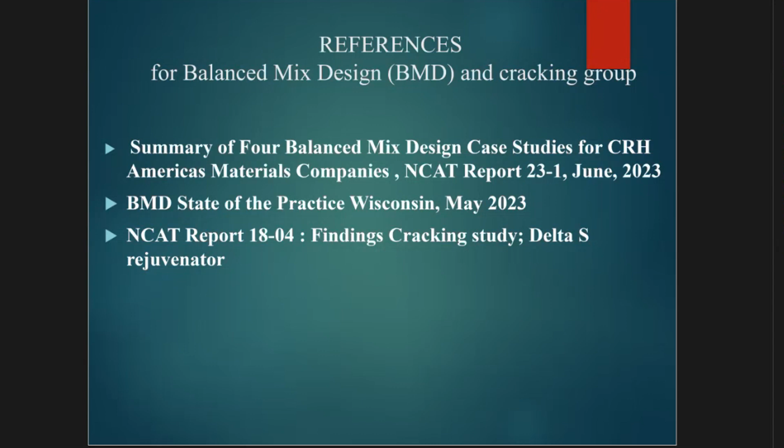And I have, for all these, references in the back for all these things, okay? I want to thank you for having the patience to listen to me going through this tour de force of asphalt. Thank you very much, I much appreciate it.